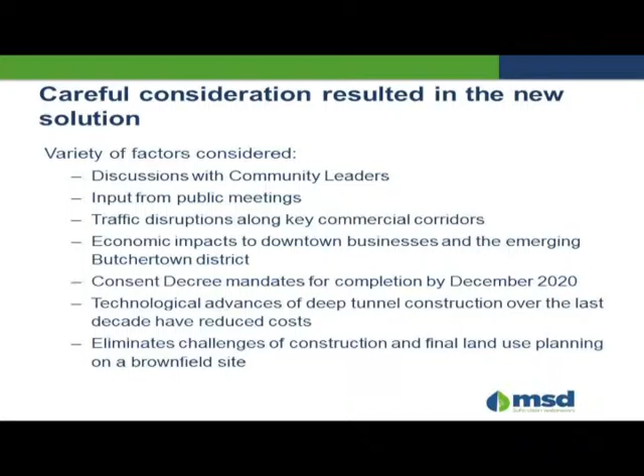There were a number of factors considered that resulted in this significant change. We've had several meetings, talked to community leaders, and they've heard about our basins in the downtown area. We've had input from public meetings, here and again at the School for the Blind Publishing House, and we've had meetings for the Story and Main.

We've considered the traffic disruptions along key commercial corridors downtown, Main Street, economic impacts to the downtown businesses and the emerging Butchertown district. These basins are right in the heart of downtown and again in Butchertown, as you know, is re-emerging. There is still the consent decree mandate to complete these projects by the end of December 2020.

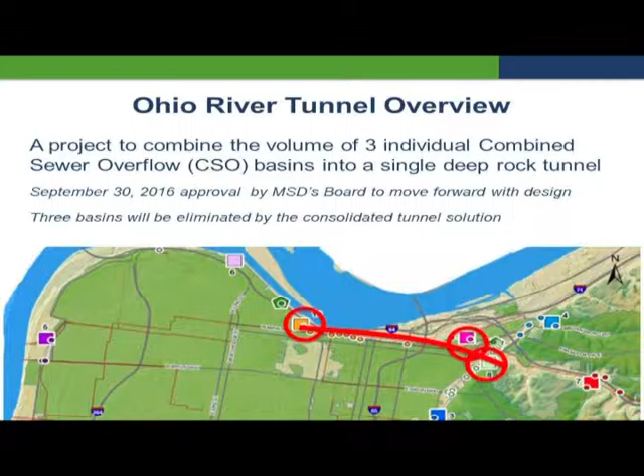As we think back over the last decade or so, tunnel construction has become more readily designed, and more areas across the country have performed and built tunnels. So there are more tunnel boring machines, and the price is more competitive as you have more equipment that can do the work.

It eliminates the challenges of construction and final land use planning on a brownfield site. A number of these sites have contaminated soils on them. So when we do this tunnel, we're not encumbered with doing a lot of remediation on a site that could cost a lot of money for the ratepayers, let alone the time for permitting and all the impacts that might be involved with working on a contaminated site.

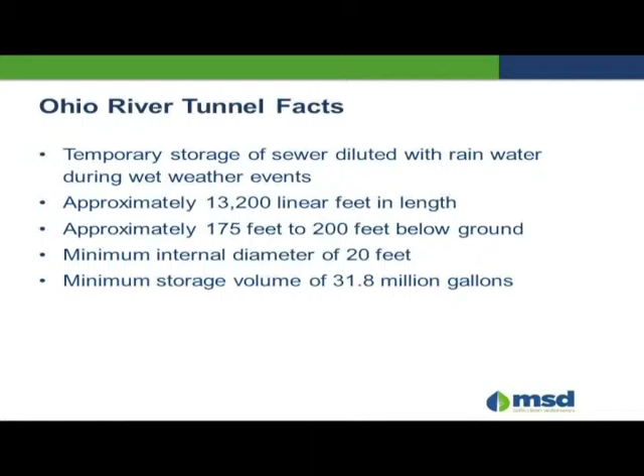As I said, we've been out to the community several times before. For the Story and Main Basin, we had an orientation meeting back in June of 2015 and the conceptual design in February of this year. For Lexington and Payne, we were out in January of this year and again in April of this year at the very location we're at tonight.

So let's talk a little about this tunnel layout, some facts about this tunnel. It's basically for the temporary storage of diluted sewer water, diluted with rainwater during wet weather events. It's approximately 13,000 feet in length from downtown running east. It'll be about 175 to 200 feet below ground, with a minimum internal diameter of 20 feet, and a storage volume of 31.8 million gallons, equivalent to what the 3 basins in total would have contained.

I would also add, on the 175 to 200 feet below ground, the tunnel itself will vary from 70 to 100 feet in solid rock, so it'll have 40 to 70 feet of rock above it, solid rock.

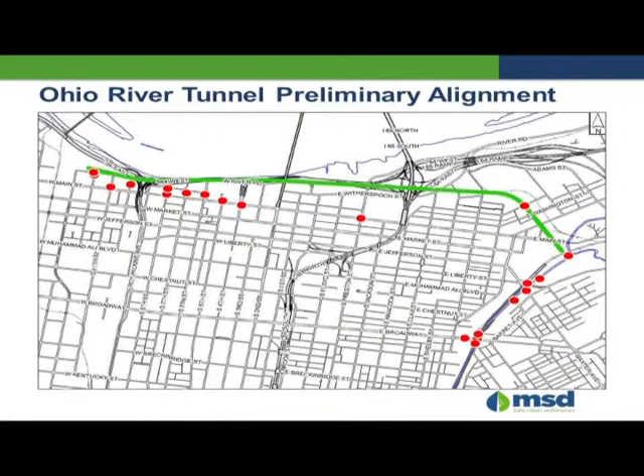When it's not raining, the sewage stays in the sewer pipe and makes it to the Morris Forman Water Quality Treatment Center. But during rain events, those pipes are overwhelmed, and that's where that sewage and rainwater leaves the system and gets its way into the waterways of Jefferson County, either Beargrass Creek or ultimately the Ohio River.

And that's what we're trying to do, is keep sewage out of the river. That's a public health and public safety concern, which is why we're doing this.

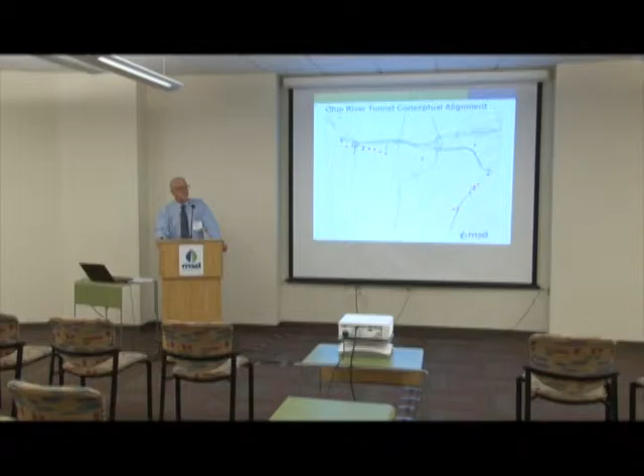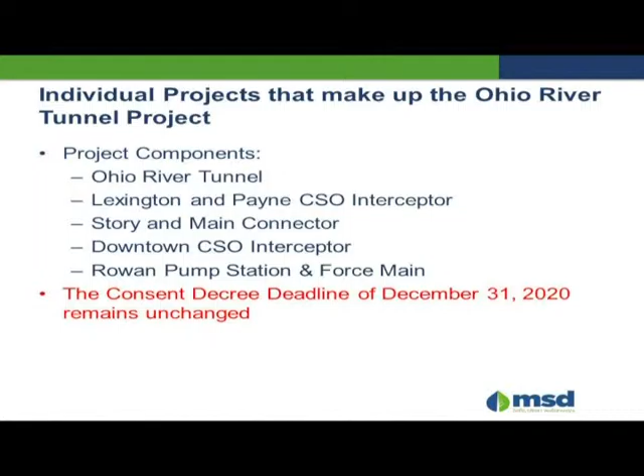So again, the tunnel runs about 13,000 feet from downtown east towards the end of that green line, basically at Lexington Road, just east of Home of the Innocents. And again, those red dots along the east side here are along the improved Beargrass Creek channel, that section of Beargrass Creek that's concrete.

There are several components that make up this Ohio River Tunnel project: the tunnel itself, the Lexington Payne Combined Sewer Overflow Interceptor, the Story and Main Connector, the downtown CSO Interceptor, and the Rowan Pump Station and Force Main.

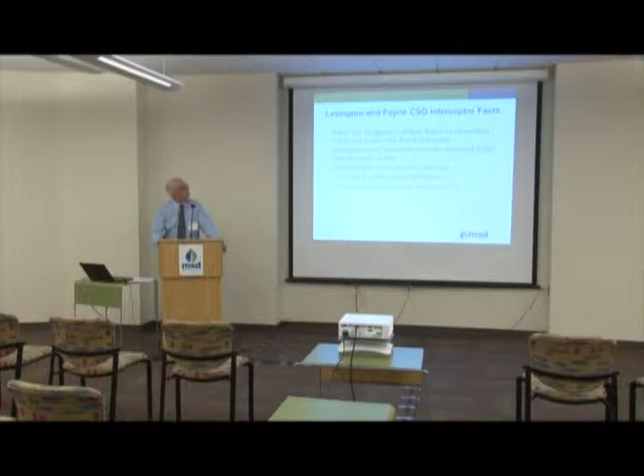And again, the consent decree deadline of December 31st, 2020 has not changed, and is not changing with this project. I would also add that those interceptors, the Lexington and Payne Interceptor, the Story and Main Connector, and the downtown CSO Interceptor, are basically unchanged.

We would still have constructed those if we were still building the basins, because those red dots are where we have to collect the water that would leave the system and get into a stream. That component of the project remains the same. The difference is the basins are going away; we're going to store and convey in the tunnel.

For the Lexington and Payne CSO interceptor facts, again that's on the east side, or right-hand side, of that map I showed. There are 9 existing CSOs. Those are where it leaves the system and goes into Beargrass Creek, in that concrete channel. When it rains, that's where it overflows to.

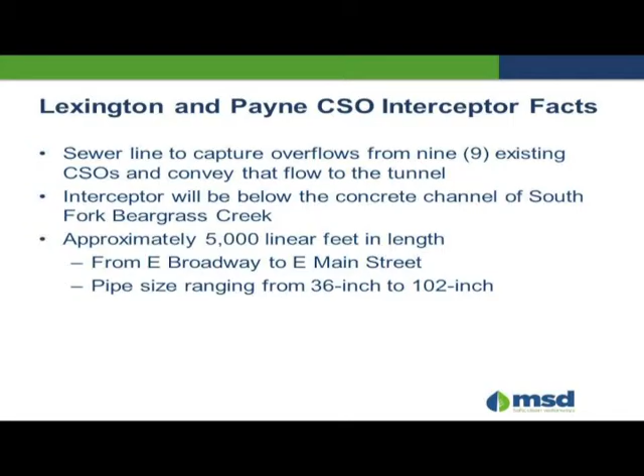The interceptor will be below the concrete channel of the South Fork of Beargrass Creek, very analogous to the interceptor that was done upstream of the Logan Basin. That was in a concrete channel for most of that as well, so we have experience building below the concrete channel.

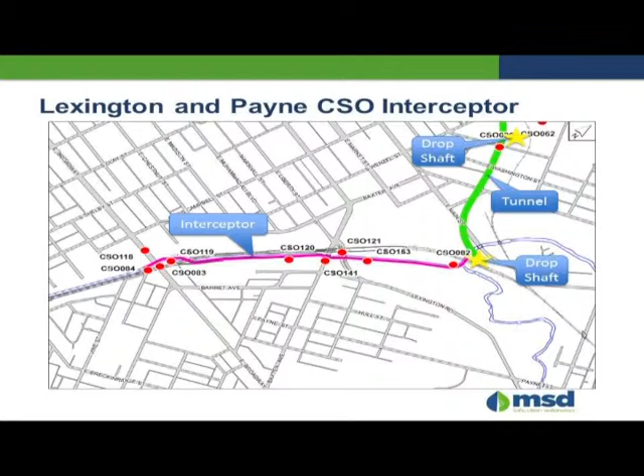This particular interceptor is about 5,000 feet in length, from East Broadway to East Main. That pipe, just to collect those overflows from those 9 CSOs, is about 36 inches to 102 inch diameter pipe. Again, the red dots represent the CSO locations, areas where the water, when it rains, leaves the sewer system and gets into Beargrass Creek.

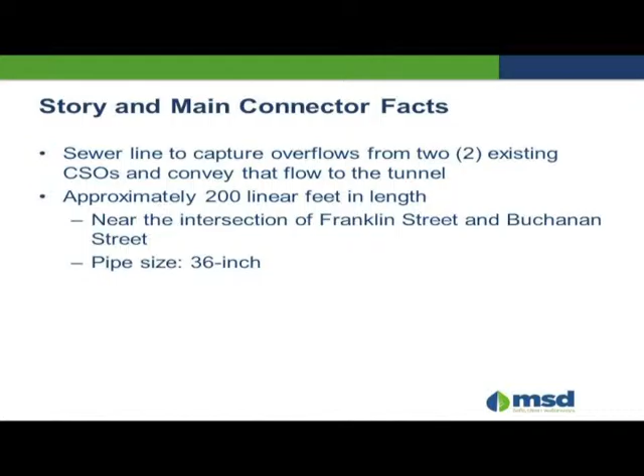The gold star there at the end is a drop shaft, so the interceptor is closer to the surface. The tunnel, remember, is 200 feet deep. So that drop shaft is where, when that interceptor collects those 9 CSO locations, it'll drop into the tunnel at that location. The one at the top is the drop shaft associated with the Story and Main connector.

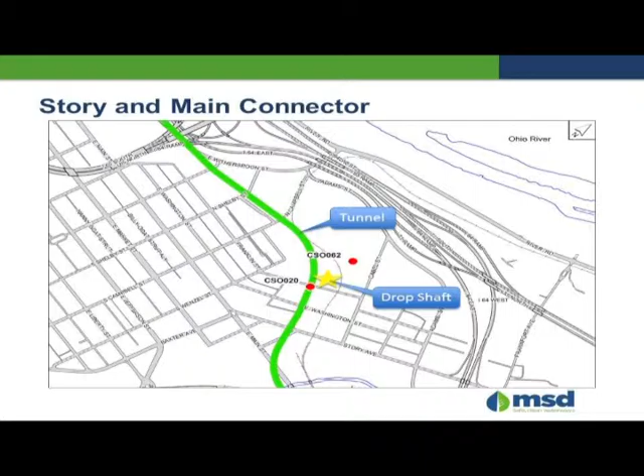For the Story and Main, there are 2 existing CSOs that would flow to the tunnel. That collector would be about 200 feet in length. Again, the tunnel's almost right underneath that, so they're not very far apart, so there's not very much pipe length to connect those two. It's near the intersection of Franklin Street and Buchanan Street, and that'll be a 36-inch pipe.

It is congested there. There is a concrete flood wall, a lot of utilities in the way, so I don't want to make it sound like it's an easy project. It's still difficult at that location, it's just not as much pipe and not as many CSOs to collect from.

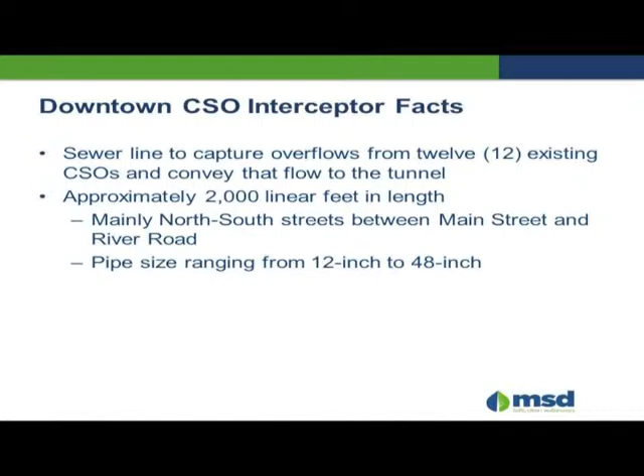Again, there's the drop shaft, roughly at Buchanan Street, and the 2 CSOs that I just spoke about. Again, the tunnel is still weaving its way to where it can be connected with these drop shafts to intercept and collect those CSO overflows.

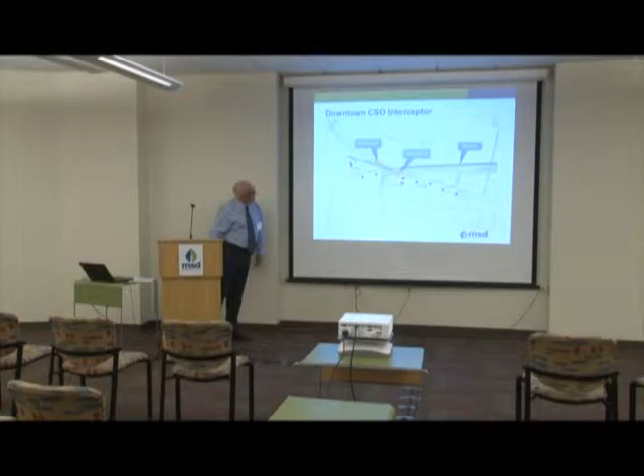Now for the downtown area, there are 12 CSOs downtown that we need to convey to the tunnel. The pipe length there would be about 2,000 feet, mainly the north-south streets between Main Street and River Road.

I'll show a map of that in just a second. And the pipe size there is from 12 inch to 48 inch.

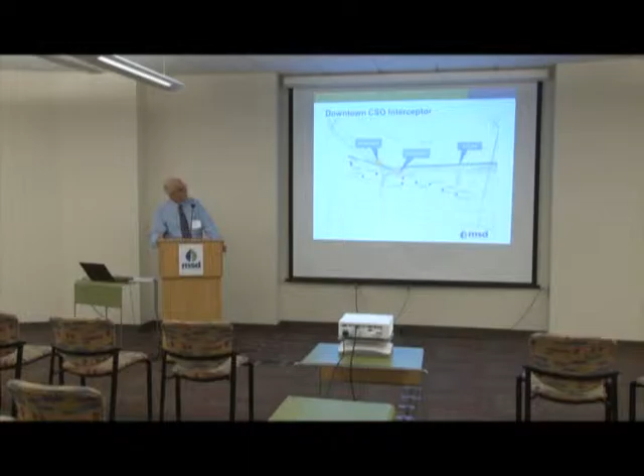You can see here again, we've got the I-64 ramp right here, and the CSOs that are primarily north of Main Street. You know that Main Street is a lot higher than River Road, so we'll collect from those running downstream towards River Road and get to the tunnel. There will be a drop shaft for those east of the ramp, and then a drop shaft on the west side of the ramp to collect those four that are on the west side.

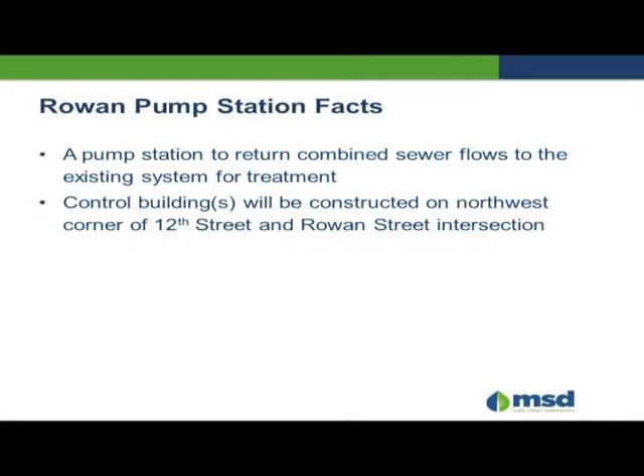We had not been out to talk about 13th and Rowan Basin, but originally we were going to go down Main Street with a micro tunnel. We found out that would have disrupted traffic for a couple of years. A lot of the old basements of those old buildings downtown go out into the middle of Main Street due to old coal shafts, when coal would be delivered and put into the buildings for heat. So there were a lot of additional problems with going down Main Street, another advantage to go to the deep tunnel solution.

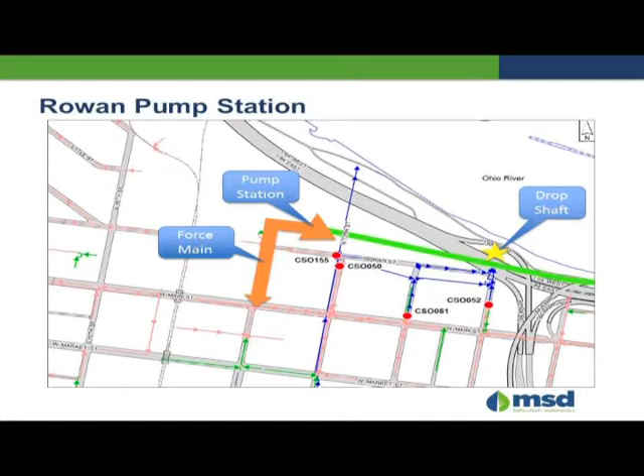Another component of this tunnel project is the Rowan Pump Station. At the end of the tunnel, the low end, where we've collected all of these overflows from 22 CSOs, there will be a pump station. There'll be an above-ground building there just to house controls, electronics, that type of thing, on the northwest corner of 12th and Rowan Street intersection. The orange diamond, the triangle shape, is the pump station, and then there'll be a short force main.

After the rain event, that combined sewage combined with rainwater, and our sewers have the capacity to receive that flow - which previously would have gone to the creek or the Ohio River - we now contain in the tunnel. So after the rain event, once we have capacity back in the sewer, we'll empty out the tunnel and put it back into the collection system for treatment at Morris Forman.

So again, it's pretty basic - we're intercepting flows that would have gone to the stream and affected public health and public safety, and we're returning that back to the system when we have the capacity to treat it. The EPA is currently reviewing this change.

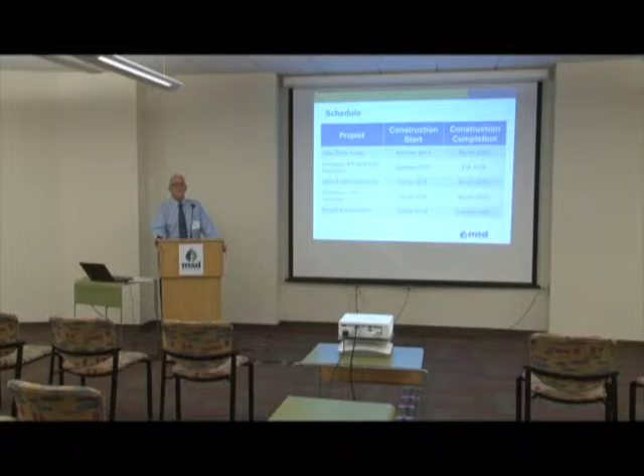It's not finalized yet. We've started the conceptual designs. We'll continue coordination with our partners at Metro, downtown, the community, and continue public update meetings as the project progresses. I don't have much more information than what I've given tonight, but MSD has come a long way in the last few years about outreach and transparency, and we will commit to being back out to the community as we have more details.

The consent decree deadline still remains, as I've said several times, December 31st of 2020. Just an overview schedule - this is as of tonight. Things could change by a quarter or so, other than the deadline, which won't change. We still need to be done.

But as far as starting, the tunnel could start as early as it needs to by the summer of next year, with completion by the spring of 2020. And again, all these projects, the pump station needs to be done by the summer of 2020 so we can meet that deadline of operationally complete by December 31st of 2020. Now, there may be some restoration or something around the pump station that we need to do at the end, but as long as it's functioning, we've met the intent of the consent decree.

So I know you're going to have some questions. We've anticipated some of those, and I'll entertain some of those right now.

Will MSD purchase the River Metals recycling property at 1371 Lexington Road, or be performing any construction activities on that property? And the answer is no. We will not be doing that. We won't be on that site. We won't be needing that site.

What will be the impact to neighbors of the project during construction? I can't give you a percentage, but a whole lot less than if we were building three huge basins at each location. In fact, the Rowan Basin would have been about 10 million gallons, the Story and Main Basin would have been about 8 million gallons, and the Lexington Payne Basin was going to be about 14 million gallons.

That would have been a lot of time and construction activity on particular sites, trucks leaving each of those sites for a 2 or 3 year period. So the disruption of the tunnel—where the work can go on even when it's raining, snowing, whatever—that tunnel being 200 feet and 60 to 100 feet in rock, rain or shine, light or dark, that tunnel machine can work. So it should be a whole lot less disruption than the alternative of 3 independent projects.